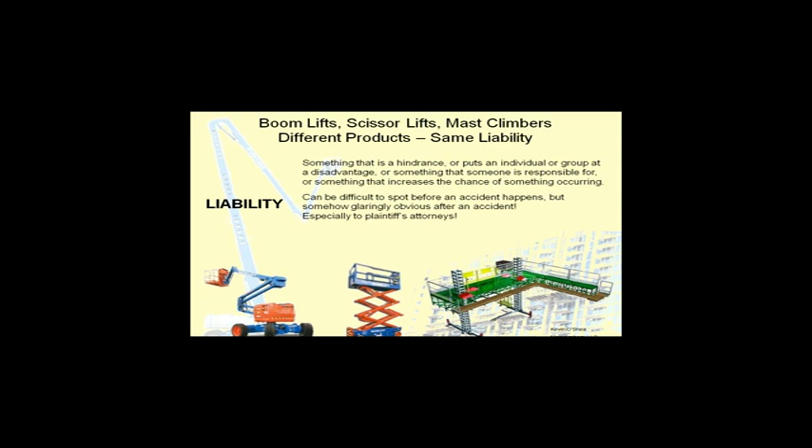Coincidentally, it's also glaringly obvious after an accident to some people, especially to plaintiffs' attorneys. So we want to look at the management of liability. And a big part of the management of liability is procedure. Procedures obviously help us to run our business, but they also help us to adhere to the regulations and to the rules that govern our business.

And I think first we should probably try and identify what those are. For the business that we are in, i.e. boom scissors, mast climbing, work platforms, etc., the regulations ostensibly begin with OSHA 1926. The regulations are the law, and we must comply. There are also rules which affect what we do as an industry. Manufacturers' guidelines or rules, for instance. ANSI standards are also rules that we should attempt to follow.

And then there is a plethora of guidance. IPAF, SAIA, ARA, AEM and AED all collaborated, for instance, a couple of years ago and produced two documents. One is on the Statement of Best Practices of General Training and Familiarization for Aerial Work Platform Equipment. And the second one is a Statement of Best Practices of Personal Fall Protection Systems for Aerial Work Platform Equipment.

There's also other guidance in the forms of OSHA quick cards and tip sheets. There is a difference. An OSHA quick card is a restatement of regulations, and a tip sheet is industry outreach guidance and best practice information that's released by OSHA's Alliance team working with the industry. And all of this stuff is good guidance, regulations and rules that we should try and have influence what we do, our procedures in our business, in order to start to manage some of the liability that we have.

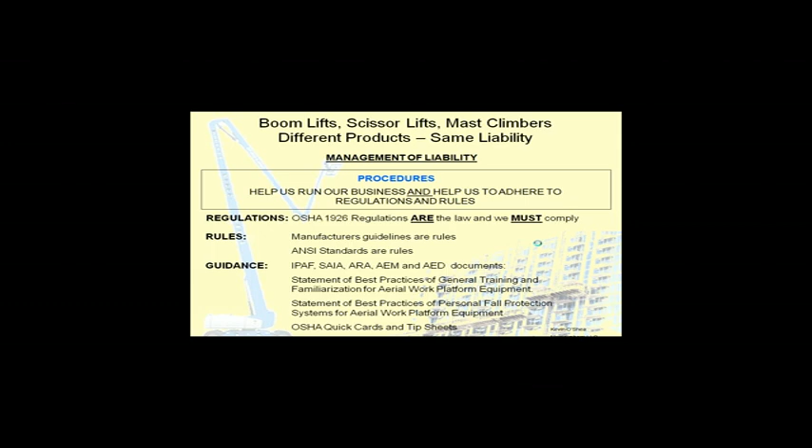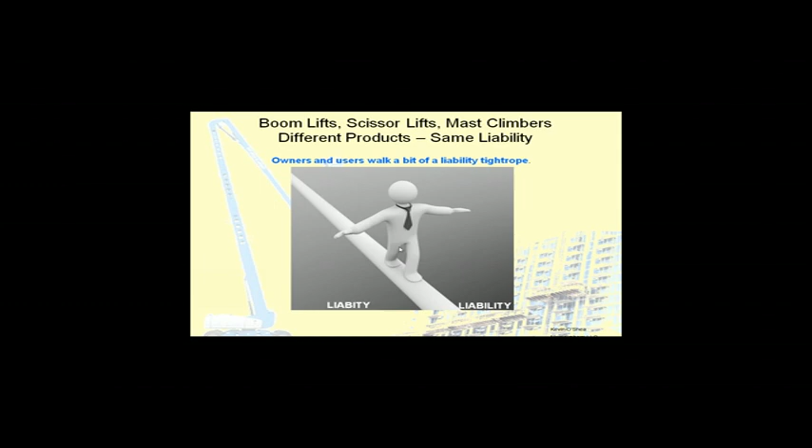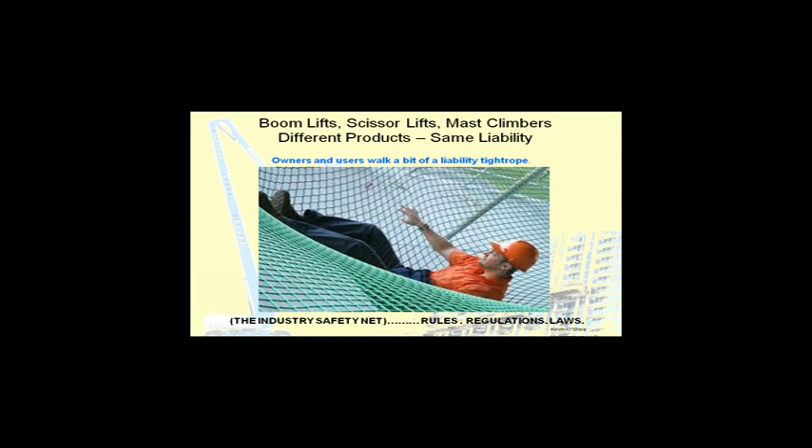Owners and users of this equipment walk a bit of a liability tightrope. It's sometimes difficult in this industry to absolutely identify what we're supposed to do, just because of some of the regulations that don't exist or that may need interpretation, which we'll come to. And what we need, what our industry has, is a safety net to protect us from some of that liability theoretically. And that safety net for any industry would normally be made up of rules, regulations and laws. Our industry safety net has some holes in it.

What I began with on one of the previous slides, which is the Code of Federal Regulations, CFR 1926, Safety and Health Regulations for Construction. Essentially written before boom lifts, scissor lifts and mast climbers were widely used in this country. Within there is a paragraph which will point towards ANSI A92.2, 1969, vehicle mounted elevating and rotating work platforms. And that is really the only OSHA official recognition of an ANSI standard, because the OSHA regulation will direct you to that particular ANSI standard.

We have also, though, a subsection within the regulations called Non-Mandatory Subpart L Appendix C Consensus Standards. Within that paragraph, you will see ANSI A92.3 for manually propelled elevating aerial platforms, 1990 release, ANSI A92.5 boom-supported elevating work platforms, 1990 release, ANSI A92.6 self-propelled elevating work platforms, 1990 release, A92.7, which is for airline ground support vehicle-mounted vertical lift devices, 1990, A92.8, which is for vehicle-mounted bridge inspection and maintenance devices, 1993, and ANSI A92.9, which is for mast climbing work platforms, 1993.

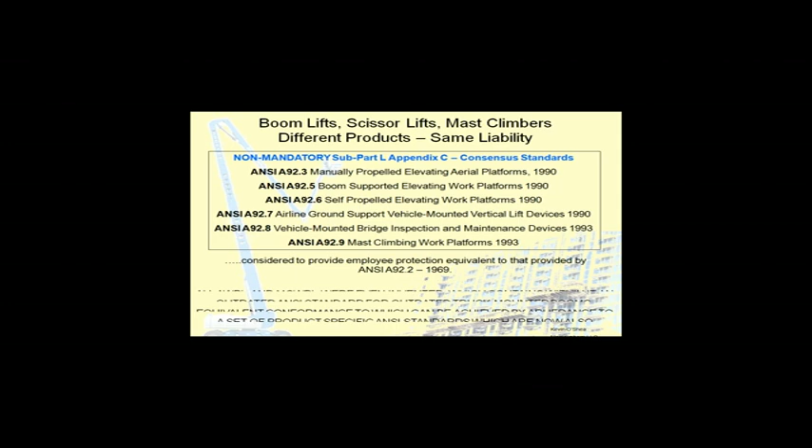And the inference is that adherence to those standards is considered to provide employee protection equivalent to that provided by A92.2, 1969 version. So essentially, a lot of that's not very helpful for us as an industry because it's asking us to conform to a scaffold standard which was written before almost all AWPs and MCWPs were even invented, which contains within it an outdated ANSI standard for outdated truck-mounted booms, equivalent conformance to which can be achieved by adherence to a set of product-specific ANSI standards, which are now also outdated.

So there are a number of areas within the standards where owners of equipment, users, contractors, must find it very difficult to plot a path through some of this regulation to come out the other end and decide what they're supposed to do and what they're not supposed to do, which of course has a direct impact on liability.

What we can use and what OSHA uses to very good effect is the 5(a)(1) or the General Duty Clause as it's known, which begins with a very simple premise: each employer shall furnish to his or her employees employment and a place of employment which are free from recognized hazards that are causing or are likely to cause death or serious physical harm. Recognized hazards being two very important words within that sentence. And it also says a hazard is recognized if the employer's industry recognizes it.

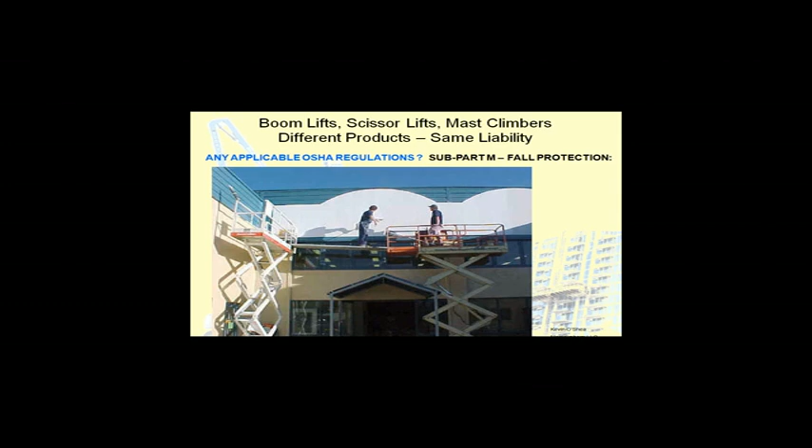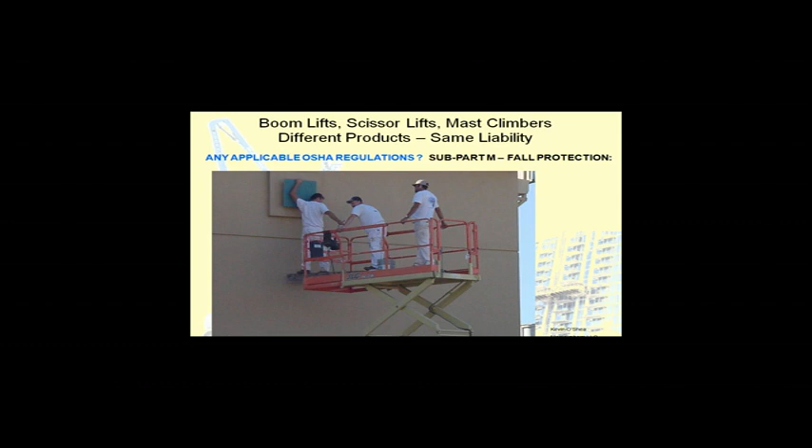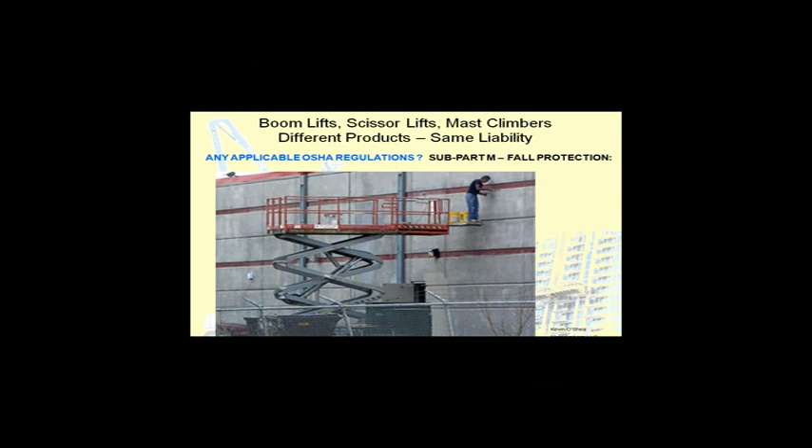Examples of disregard for subpart M exist on every job site. Some of them are worse than others, but what we see all the way through these examples is that there is a lack of respect for the hazard itself and obviously a lack of training for best practice. So all of these different disregards for subpart M, fall protection, are obviously punishable by citation, etc. I'm sure some of them obviously relate into accidents, and that's when liability obviously becomes much more of an issue all round when it comes to civil suits and not just citations but also injuries, etc., which we'll come to.

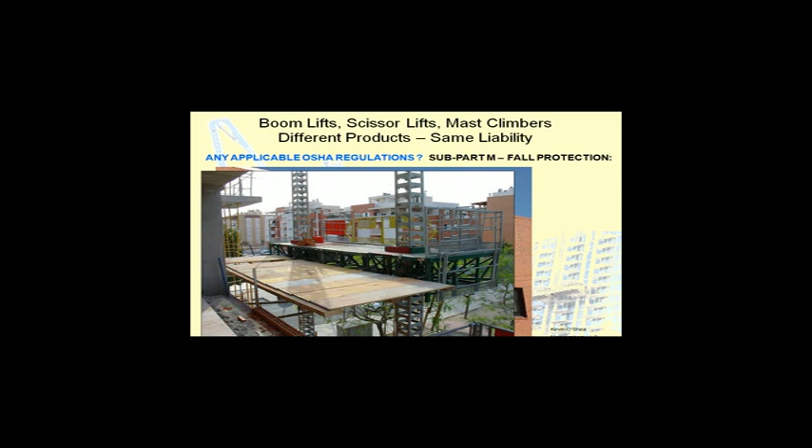Here's an example of a mast climber, which is a state-of-the-art mast climber, and unfortunately it's been ruined by somebody not paying attention to proper fall protection regulations with regard to guardrails and exposed areas and edges, and also hasn't paid any attention to OSHA's planking requirements, as we can see here also. There's another one where someone has decided to manufacture themselves an extra piece of platform using, actually that's the steps that get you up into the platform, and have decided to attach them to the corner of the machine with some tie wire in order to get out another couple of feet on one corner.

Here's another one. And we're going to come to something which is quite important, which is the job survey. If we look at this particular picture, you'll see that the contractor has clearly rigged something up to get to the corner area of the facade on which he or she is working. The job survey and the planning process, one would have thought, would have highlighted the requirement to get to that area, and therefore it should have been properly planned for.

What's happened is that no one has taken cognizance of the necessity to get to the corner area. The machine has been built, the contractor has realised that he needs to get round the corner and has decided to find a number of pieces of material on the job site which he's fashioned together into a corner return, which is of course wholly insubstantial. And the last one, which kind of just breaks every rule that I could think of, but again, all part of flagrant disregard for OSHA regulations.

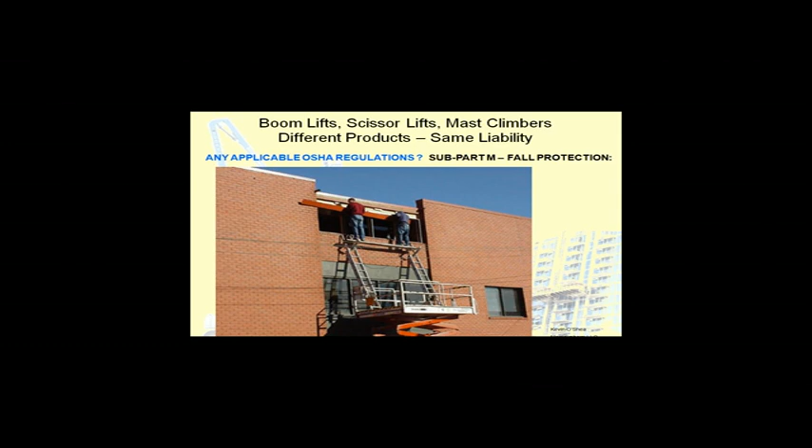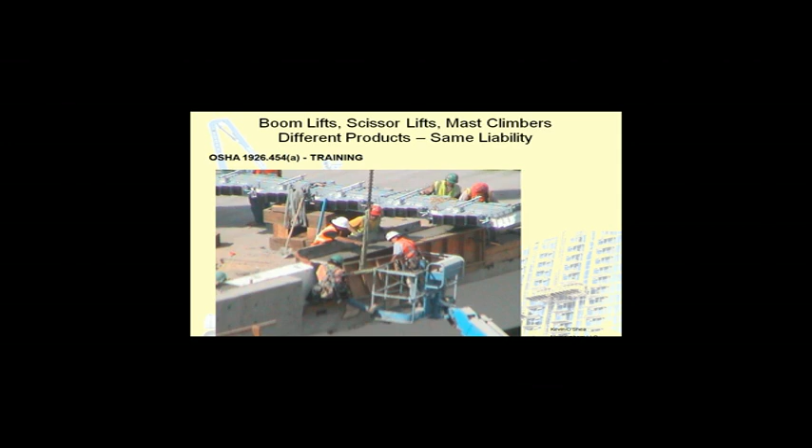Training also affects what we do. OSHA has training requirements, and training is required to prevent this kind of misuse of equipment. Clearly, these are things that shouldn't be done. Training should be highlighting the kind of behaviour that's expected of someone who's operating this kind of equipment. People who are performing these illegal acts, if you like, should also be aware through training of their precariousness. Another one here. Someone trying to protect himself, I guess, from the sunshine and possibly the rain. The sail effect of this kind of thing on a platform exerts a lot of extra load, which the machine may well not be designed to take.

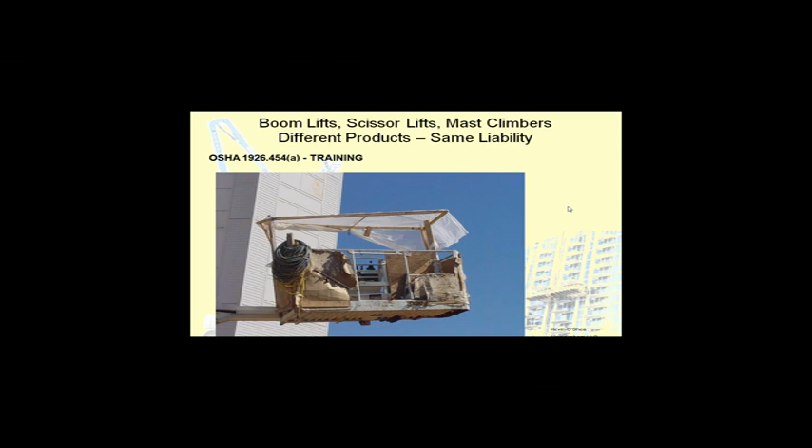And OSHA also has something to say on stability, whether it be a boom lift that's working in an area where no one has assessed the ground's ability to take the load that's being imposed, or alternatively the other type of stability, which is that the machine has to be situated on some kind of stable mud sill arrangement if it's required. For instance, like on mast climbers, they will require mud sills under the outriggers. This is clearly not acceptable.

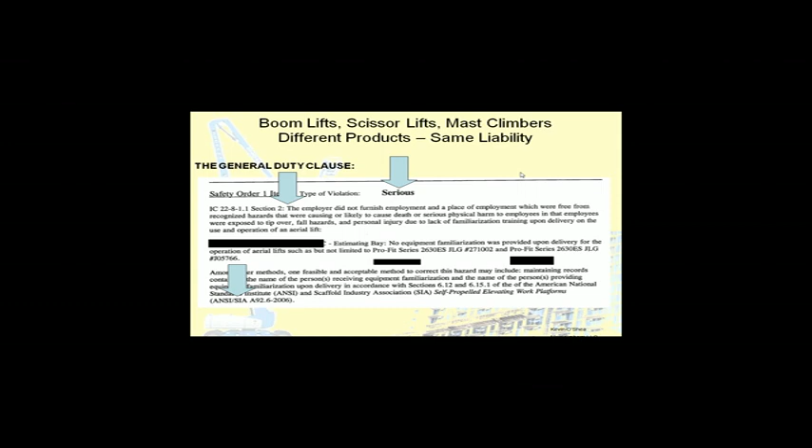In that employees were exposed to tip over, fall hazards and personal injury due to lack of familiarization training upon delivery on the use and operation of the aerial lift. Then it follows with the location, the type of equipment that was delivered by the rental company. And if we go to the bottom of the citation, as a method of abatement, there is direct reference made to the ANSI A92.6 2006 standard. So this is an example of where an OSHA compliance officer will invoke the 5(a)(1) general duty clause and use industry information like an ANSI standard in support of that violation.

Something you may want to do if you don't do it: OSHA have a category called the Fat Cat reports, fatalities and catastrophe reports. OSHA will report anything where there is an employee-employer relationship in terms of fatalities, catastrophes, serious accidents. They also have a database where you can look for citations. In the last 28 days, I found 6 citations for general duty clause violations on aerial work platforms and mast climbers. There were other citations with regard to fall protection, training requirements, and aspects of 1926 that do apply to our product. But this was just the general duty clause violations.

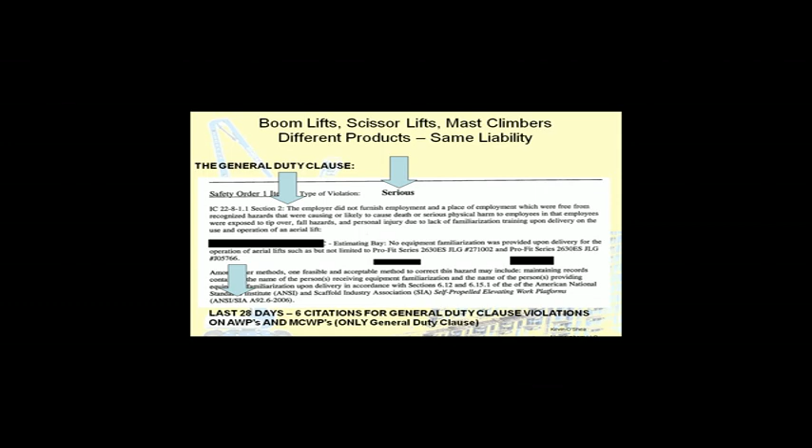So as an owner of equipment, as a user of equipment, we have to have important information with us. The phrase in the general duty clause is recognised hazards. We have to protect our employees and give them a place of employment which is free from those recognised hazards. How do we recognise that hazard? Well, it comes in the form of information. It comes in the form of manufacturer's manuals. So do you have them? Do your employees have access to them? And do they understand them?

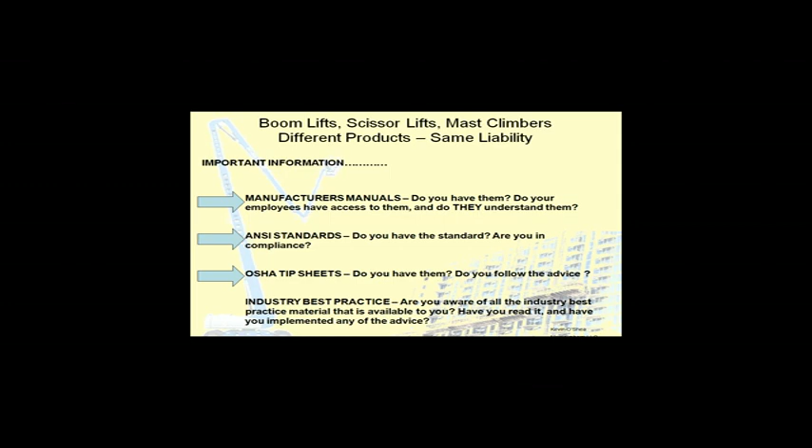It comes in the form of the ANSI standards. Do you have a copy of the ANSI standard? Are you in compliance? It comes in the form of the OSHA tip sheets. Have you downloaded them from OSHA's website? Do you follow the general advice that they give you? And it comes in the form of industry best practice. Are you aware of all the industry best practice material that is available to you? Have you read it? And have you implemented any of the advice? So, going back to the wording of the general duty clause, each employer shall furnish to his or her employees employment and a place of employment which are free from those recognised hazards.

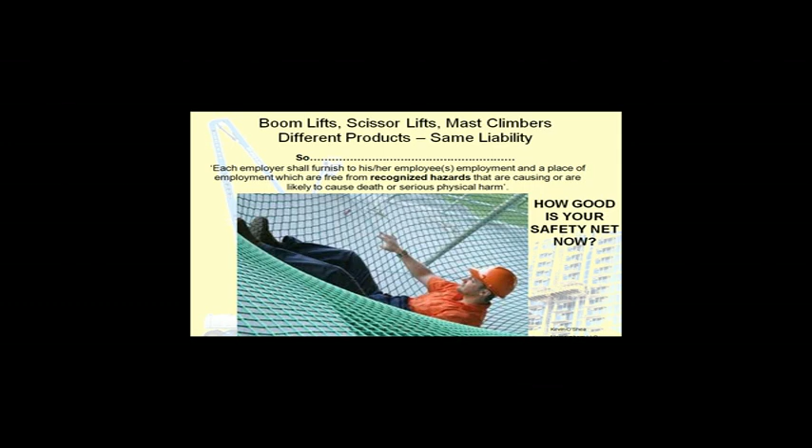How good is your safety net now? How much of this have you done? How much of it do you think that you should do to mend those holes in your safety net? A lot of people I talk to tell me that they place some faith in their insurance companies. Insurance companies are obviously vital to your business, but they don't know about your business. That's the point behind insurance companies. They think that you know about your business, which is the vital point.

If you're unlucky enough to have an accident and you call your insurance company, you're going to get a deluge of emails and phone calls from insurance personnel, the insurance company attorneys and lawyers, and they're going to be asking you for documentation. They're going to be asking you for training records, procedures, service records. Read their statements and declarations exhaustively. They're going to put together a storyboard of what they think happened in order to defend you. You have to read it and make sure that they are factually correct. Insurance companies don't really know your business. They need you to know your business.

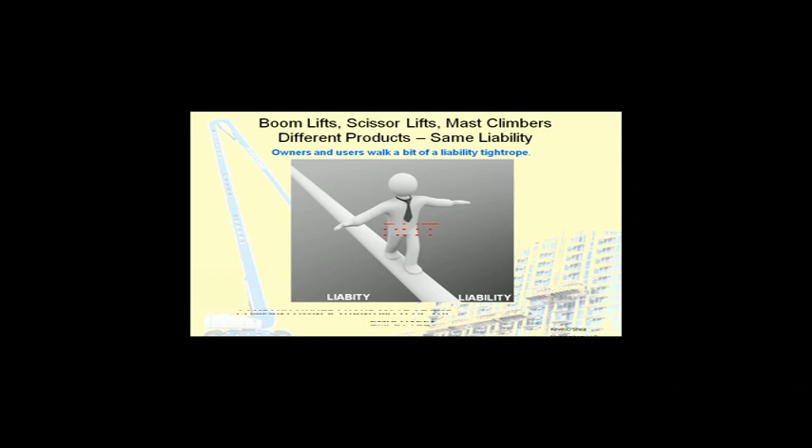So, our owners and our users of booms and scissors and mast climbers walk this liability tightrope. But most company owners hand most of their liability to their employees. Your operational staff are walking the tightrope on your behalf on a daily basis. If they fall, so could your business. So make sure they don't.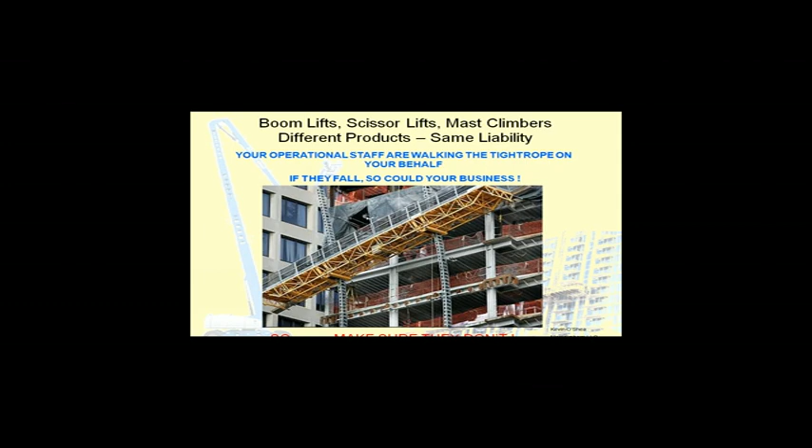Therefore, there may well be additional liability, lack of training, lack of education. So we have to make sure that when we ask somebody to do something, we know that they have the tools and the experience and the training to be able to carry it out.

What's the cost of an accident? God forbid something should happen, and this is quite interesting to me. The National Safety Council produce figures at times during the year where they look at average direct costs. One that I read recently was about $38,000, average direct cost of an accident. And that was based on emergency room, doctor's visits, medical bills, medicines, rehabilitation, etc.

Alarmingly, indirect costs were assessed at $150,000. Administrative time dealing with medical care, raises in medical insurance plan costs, replacing the lost hours of the injured employee by hiring another one, loss of reputation, loss of confidence from customers, unwanted media attention. The list is endless.

$188,000 with a sales margin of 5%. I hope your salespeople are good, because that's another $3.8 million in sales they'd have to generate in the year to pay for the cost of the accident so far. And there are other considerations: damage to the equipment, OSHA fines, possibly resulting civil action, and a detrimental effect on the experience modification factor, which of course is part of a general contractor's selection criteria on most of the big jobs these days.

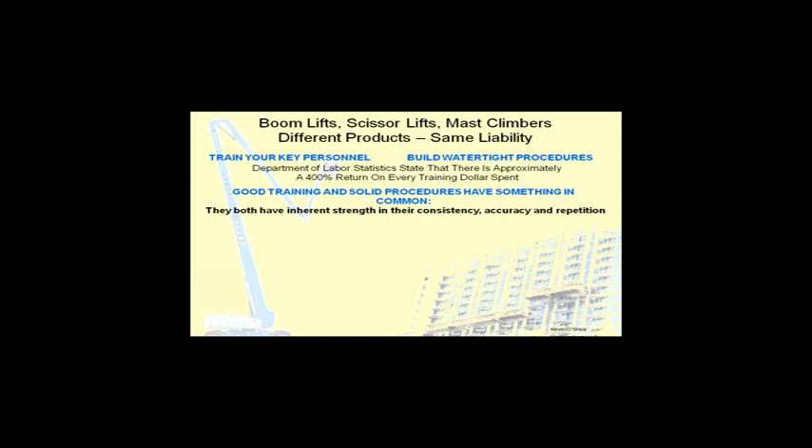So you have to train your key personnel, invest in them, and you have to build watertight procedures. The Department of Labor statistics have stated that there is approximately a 400% return on every training dollar spent. And good training and solid procedures have something in common. They both have inherent strength in their consistency, in their accuracy, and their repetition.

Contractors who succumb to the industry's tendency for instant gratification, and training companies who need business, can very quickly erode the consistency and the accuracy of the training. And these are the very values which will lend more protection against liability. It's a sad fact that contractors have asked trainers in the past to just sell me the training cards, somehow thinking that that gives them a good deal. So the training company walks away, and the contractor who really, really needs that training doesn't get any.

If owners and users would sit back and look at the wider picture, they would be beating down the doors of training companies and burning the midnight oil writing procedures to protect themselves. Let's look at one example, the job survey. I'm going to start with an OSHA definition of scaffold. OSHA's definition of scaffold means any temporary elevated platform, supported or suspended, and its supporting structure, including points of anchorage, used for supporting employees or materials or both. So that's all of us.

And then I want to follow up with 1926.21(b)(2), the general statement, which says the employer shall instruct each employee in the recognition and avoidance of unsafe conditions and the regulations applicable to his or her work environment to control or eliminate any hazards or other exposure to illness or injury. And then let's look at the scaffold training specific. The employer shall have each employee who performs work while on a scaffold trained by a person qualified in the subject matter to recognize the hazards associated with the type of scaffolding being used and to understand the procedures to control or minimize those hazards.

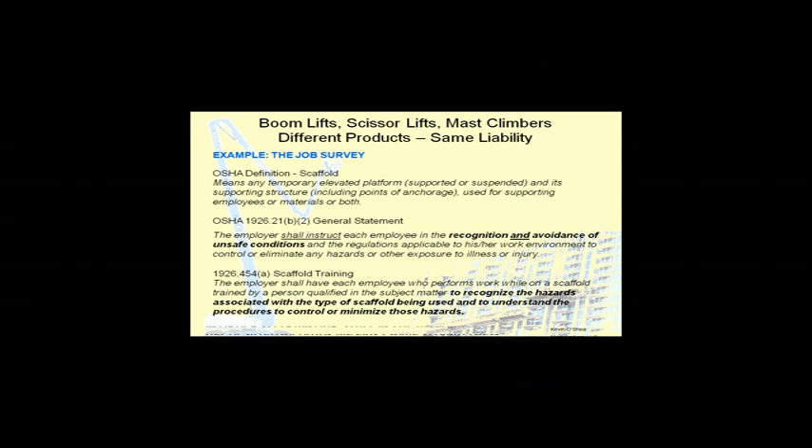In order to train our staff in the avoidance of recognized hazards, we first have to find the hazards. This means we should perform a job survey. So what's a job survey? A job survey is a risk assessment and requires to be completed by a qualified person. That person has to walk onto a job site, has to identify the hazards, has to evaluate the risks and who may be harmed and how they may be harmed, has to define, document and implement control measures for those hazards, and has to review the implementation as necessary to make sure that it's still working.

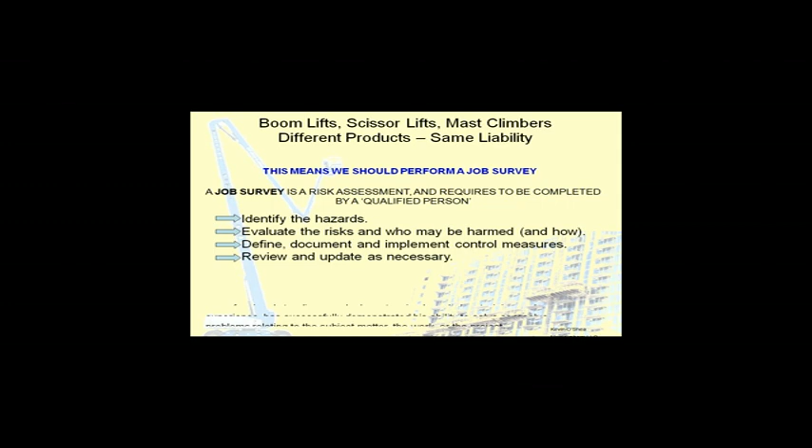Qualified definition means by possession of a recognized degree, certificate of professional standing, or who by extensive knowledge, training and experience has successfully demonstrated his or her ability to solve or resolve problems relating to the subject matter of the work or the project. That's the kind of person who should be performing a job survey.

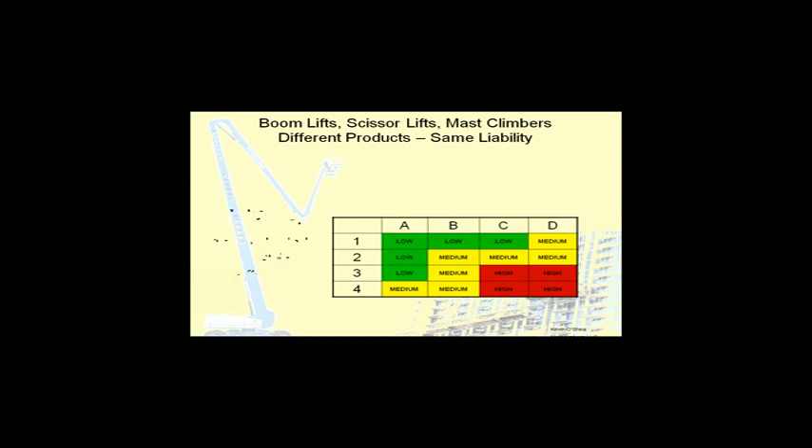Once we produce a job survey, we have to analyze the severity of what we find. There are industry tables of information out there that one can use. This one is something that I use. What we have is 1, 2, 3, 4 on the left-hand side on our table is the likelihood of the hazard occurring. 1, is it highly unlikely? 2, is it possible? 3, is it probable? 4, is it certain of occurring?

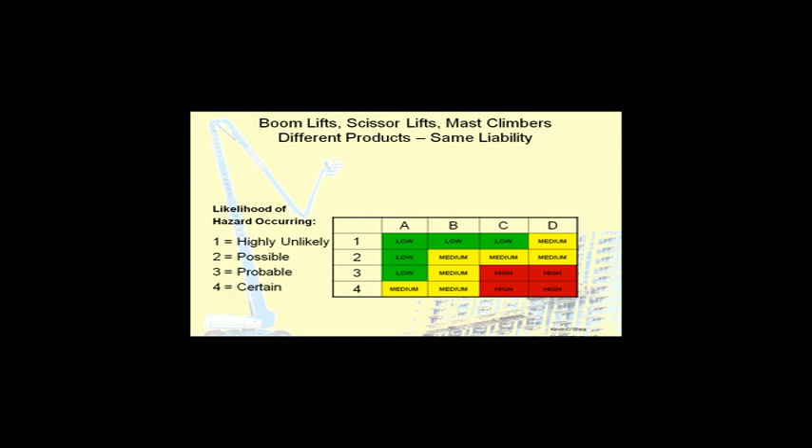And then along the top, we have the severity if the hazard occurs: A, minor injury, cuts for instance, B, broken limbs, C, serious injuries, D, permanent incapacity. And then we have a key for our 3 colours in our table. If we analyse the risk and it falls in the green area, we've got to consider putting up maybe warning signs. If it's yellow, there's training and hazard physical control involved, for instance guarding, to bring it down into the green zone.

And if we find anything that we analyse that's in the high part of the table, it's unacceptable. We have to prohibit it, we have to do something different, but we can't carry on with it in any circumstance. If we look at the likelihood being highly unlikely, or 1, and if it happened it would cause a minor injury, that would define that hazard as low. Therefore, going back to our key at the bottom of the page, we may then have to think about maybe a small warning sign or something of that nature just to deal with a small residual risk.

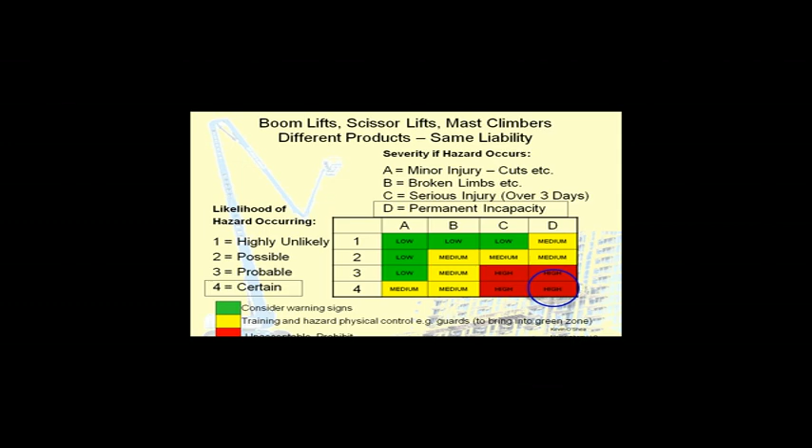However, if we go to the likelihood where it's certain and where it would cause permanent incapacity, that takes us to a high residual risk or a high risk, and it's unacceptable. So by analysing each of the unsafe situations, the hazards that we find on the job site in this way, we can decide whether we have to leave it the way it is if it's safe, put up a small sign, manage it by putting a guard around it or training specifically on the task, or doing something other than the task if it's very, very risky.

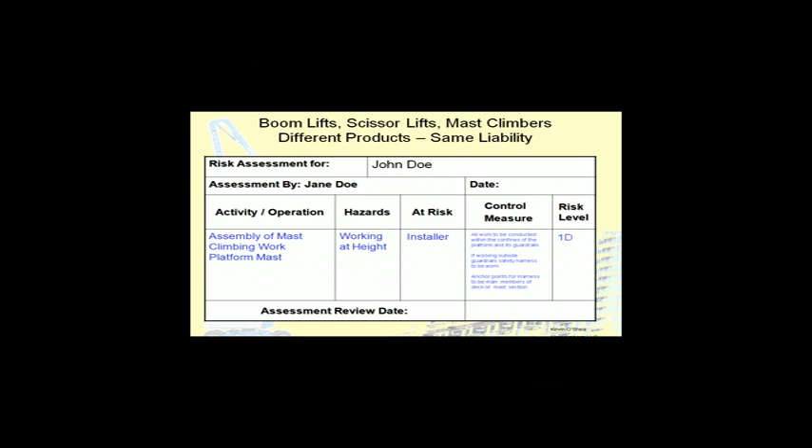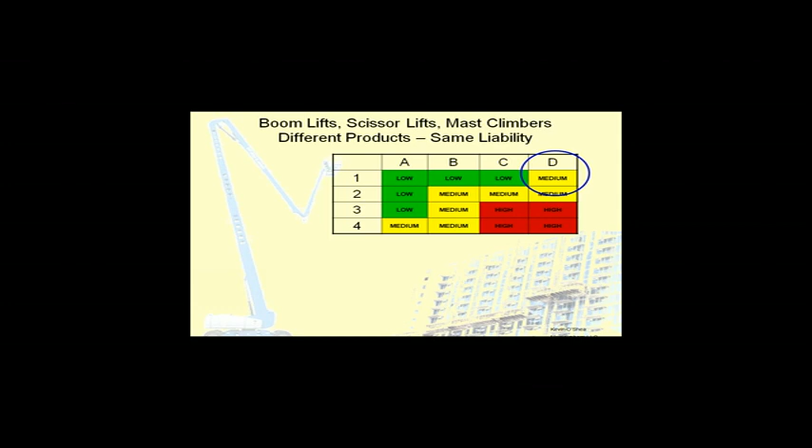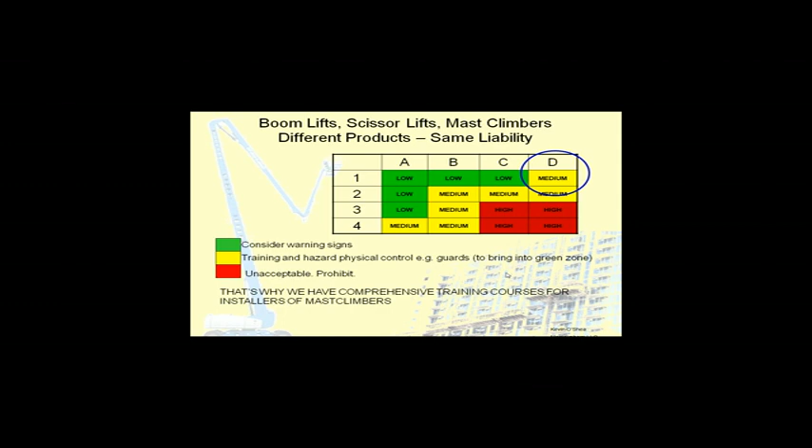Once we put those control measures in place and we analyse the risk, it still comes out to a 1D on our table. Going back to our table, a 1D is a medium risk, so we still have to do something about that. The medium risk says training and hazard physical control, example guards, to bring it into the green zone. That's why we have to comprehensively now follow on and train our installers of mast climbing work platforms. Once they are trained, that medium risk will then be managed by training into the green or the low area of the table, and it will be acceptable to go ahead.

Who is responsible for identifying risks and hazards? The employer is responsible. The ANSI standards state, before use, the work site shall be surveyed for hazards. So the question is, who surveyed the job? Who identified all the hazards? Who selected the most appropriate type of access equipment based on the job survey? And if someone did survey the job and identify potential hazards, was he or she qualified?

Here's a rental company scenario that we have on an everyday occurrence. Contractor calls a rental company and over a 10-minute conversation is asked a series of questions. What height do you need? 50 feet. Is that working height or platform height? Platform height. Boom, scissor or mast climber? Boom. Articulated or telescopic? Don't care, just get me a 50-foot boom. Four-wheel drive or steer or oscillating axle? Does that cost extra? Yes.

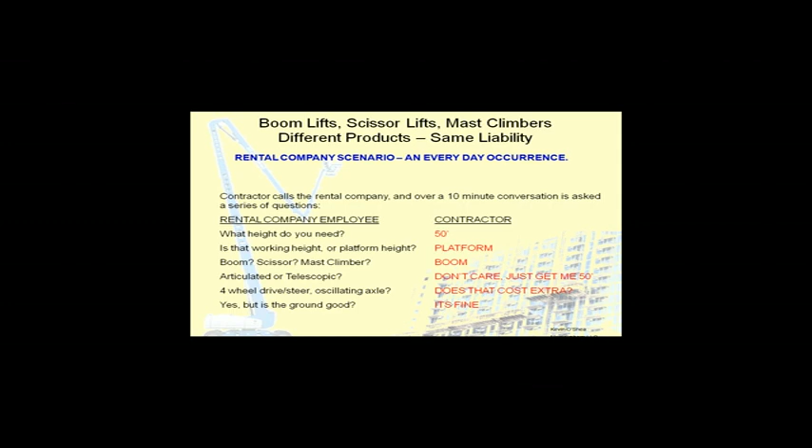But is the ground good? Yeah, it's fine. Are you sure? Four-wheel drive might help. No thanks. Gas or electric? Gas. When do you need it? Tomorrow morning. Those questions come out in a 5 or 10-minute conversation on the telephone, amongst other kind of small talk and all the usual kind of talk that we have between a hire desk individual and a potential customer. The rental desk clerk is asking those questions in particular to determine what the customer wants. But the contractor can sometimes think he's in a discussion to identify what he needs.

It's therefore possible for a contractor who hasn't surveyed the job to call and order aerial work platforms from a rental desk employee who hasn't surveyed the job either, and who, by asking some basic questions to identify the machines the customer wants, delivers wholly unsuitable equipment to the job site. And if anything goes wrong, the contractor has the liability. So contractors and owners can't easily transfer their responsibilities.

The contractor may well have presumed that he was getting constructive advice from the rental desk clerk. He wasn't, because it's not the rental desk clerk's responsibility to do it. It's the contractor's responsibility to conduct a job survey, decide what the hazards are, and decide what type of equipment he or she needs to overcome those. So owners or users of booms and scissors and mast climbers should accept certain responsibilities and plan to manage them.

When it comes to training, operators and installers of the equipment should be trained and familiarized by a qualified person. Identify your key employees in the safety chain. For example, identify those who need to be qualified. Identify those who need to be competent. Identify your installers. Identify your operators. Ensure that each level has the appropriate amount of training and experience for the job that they have been asked to do. Ensure that your nominated competent persons also have been clearly indicated by you, by the company, as having the authority to stop the job and take corrective action if necessary.

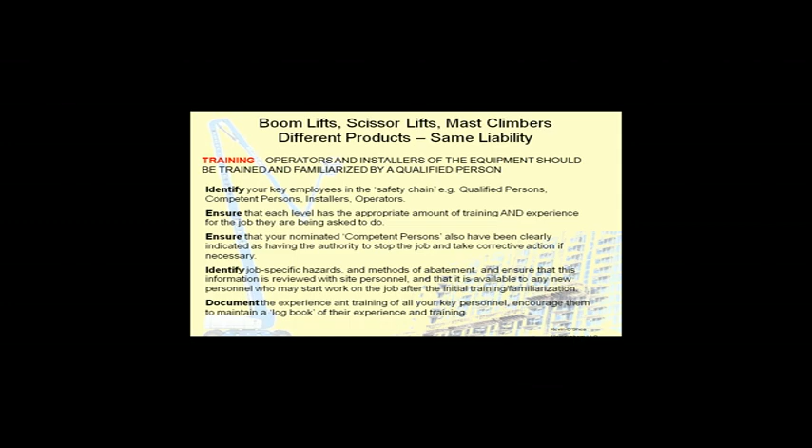Identify job-specific hazards and methods of abatement, and ensure that this information is reviewed with site personnel and that it is available to any new personnel who may start work on the job after the initial training and familiarization. Document the experience and training of all of your key personnel. Encourage them to maintain a logbook of their experience and training. A logbook, if they can be encouraged to keep it, is a fantastic legal tool that proves their experience, that proves the longevity of their experience in working with a product.

Inspection. The equipment requires to be inspected before use and periodically according to the requirements of the manufacturer and by ANSI by a qualified person. Manufacturer's inspection requirements must be adhered to. Make sure you know what they are. ANSI inspection intervals are a good backup if there is insufficient manufacturer info. For instance, some manufacturers have gone out of business. You may have equipment where you can't get manufacturer's advice. The ANSI standard is a good backup.

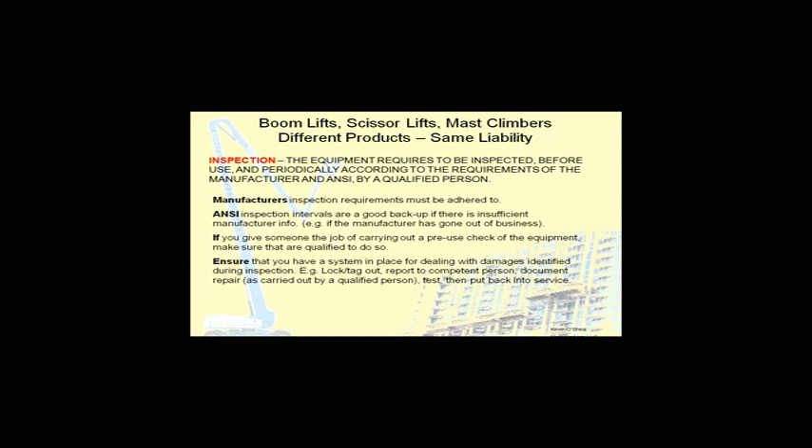If you give someone the job of carrying out a pre-use check of the equipment, make sure that they are qualified to do so. Make sure you've had them trained. Ensure that you have a system in place for dealing with damages identified during inspection. For example, lock and tag it out, report it to a competent person, document the repair as carried out by a qualified person, test the machine, then put it back into service if it tests okay.

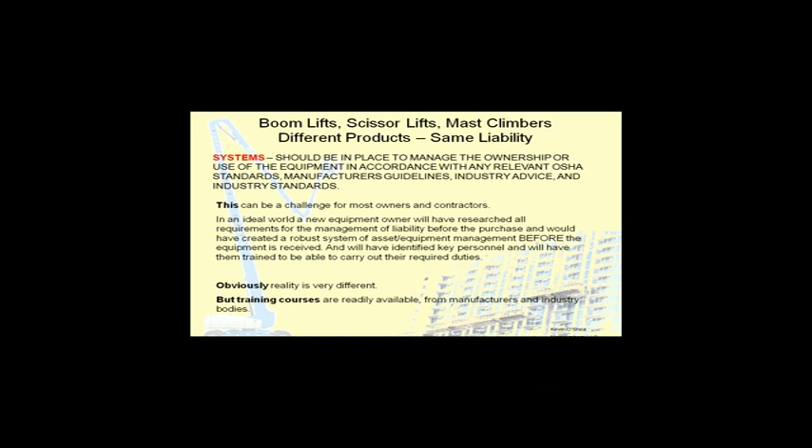Systems should be in place to manage the ownership or use of the equipment in accordance with any relevant OSHA standards, manufacturers' guidelines, industry advice, and industry standards. This can be a challenge for most owners and contractors. In an ideal world a new equipment owner will have researched all the requirements for the management of the liability before the purchase and would have created a robust system of asset or equipment management before the equipment is received, and will have identified key personnel and will have them trained to be able to carry out their required duties. That's obviously not what happens. The reality is very different. But training courses are readily available from manufacturers and from industry bodies.

Booms and scissors have operator training available, demonstrator training available, instructor training, service training, and probably very important, management training. Mast climbers have operator training, mobile operator training, demonstrator training, installer and advanced installer training, instructor training, service training, and again that all-important management training course.

If there are 3 immediate steps to drastically improve your liability control that you can take: invest in training for your key management and operational people. Identify who they are, identify the responsibilities they have, and find training for them as soon as possible. Not only will that protect you by having people who are trained in key roles and positions in your organization, but it means that that training should filter down into other areas of your business.

Find internal or industry expertise to help you to put a simple but a watertight set of procedures in place, which will keep you in compliance. Procedures don't have to be the size of War and Peace. They don't have to be 5,000 pages long. An effectively written, simple procedure is sometimes much more effective because people can understand it, and therefore they are happier to follow it.